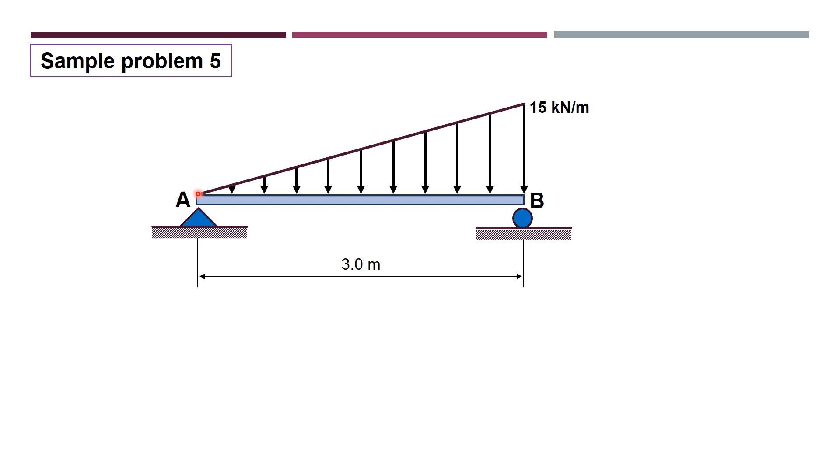So in this problem, or in this beam, we only have one segment, AB, with distance of 3 meters. And the load is a uniformly varying load, which is from 0 to 15 kilonewtons per meter. And this is distributed all over AB. These are the reactions at the supports. And passing an imaginary cutting plane with distance x, this is now our free body diagram.

So for the meantime, sinama ko muna ito, imaginary portion to the right side of the cutting plane, kasi gagamit ulit tayo ng ratio and proportion dito. Just like one of our previous problems. So this is the triangle depicting this load na gagamitin natin for ratio and proportion.

So dito sa tapat na ito ng imaginary cutting plane, ito yung hahanapan natin ng ordinate, and I used symbol y for that ordinate. And from this ordinate, it has a distance x hanggang dun sa A. And then, of course, para dito sa ordinate na 15, hanggang doon, ang distance ay 3 meters. So, we will use this for the ratio and proportion to get y in terms of x.

And this is our equation. So, we have 15 is to 3 as y is to x. If we simplify this to get y, we have y equals 5x. And with this, we can also get the equivalent single force of this triangular loading over the distance x. This is equivalent to the area of this triangle, which is 1/2 ng y by x. And y is 5x, so R is 1/2 multiplied by x multiplied by 5x, or R is 2.5x squared.

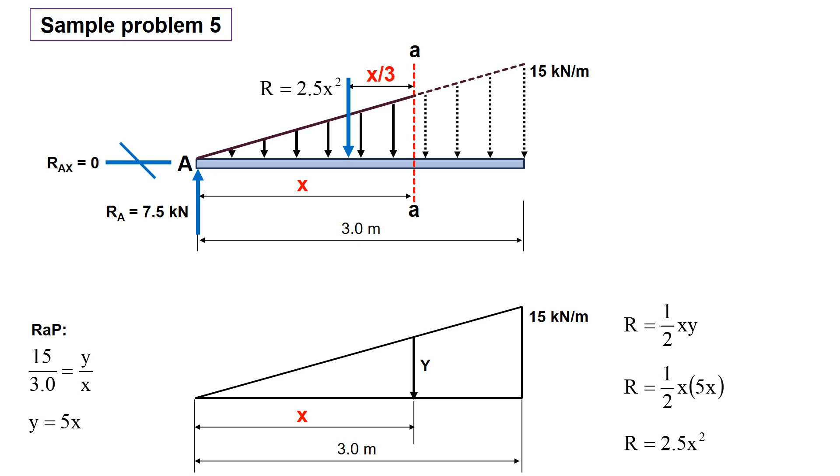Now, for the shear equation, we will sum up all the vertical forces to the left of the imaginary cutting plane, or yung nasakop nito. We have this vertical force RA and this R, which is 2.5x squared. So we will just sum up, considering their directions also. So we have upward 7.5 positive, and then minus 2.5x squared.

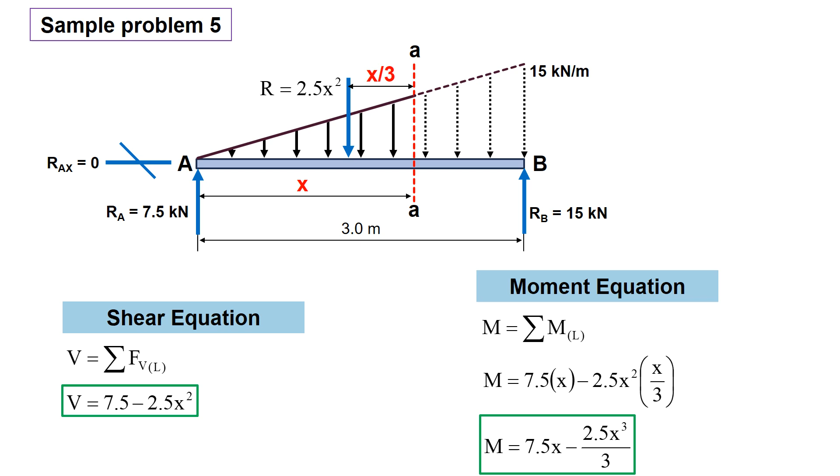And for the moment equation, we have 7.5 by x, this is clockwise, and this is counterclockwise. So that's minus 2.5x squared by this distance x over 3. And simplifying, we have 7.5x minus 2.5x cubed over 3.

Now, let us tabulate the values. Again, from A to B lang tayo. So we will not use any increments, so our x is 0 and x is 3. Using these equations, when x is 0, this is the shear and the moment. When x is 3, this is the shear, and this is the moment also.

So, notice the values of the moments here. When x is 0, nandun tayo sa point A, which is the left end of the beam. When x is 3, nasa right end tayo ng beam, which is B, and the moment is 0. So again, kapag nag-drawing tayo ng shear and moment diagrams, kailangan mag-close sa 0 yan. So with regards to the moment, using the two ends only of the segments, ito ay nakuha nating values ng moment. So let us see.

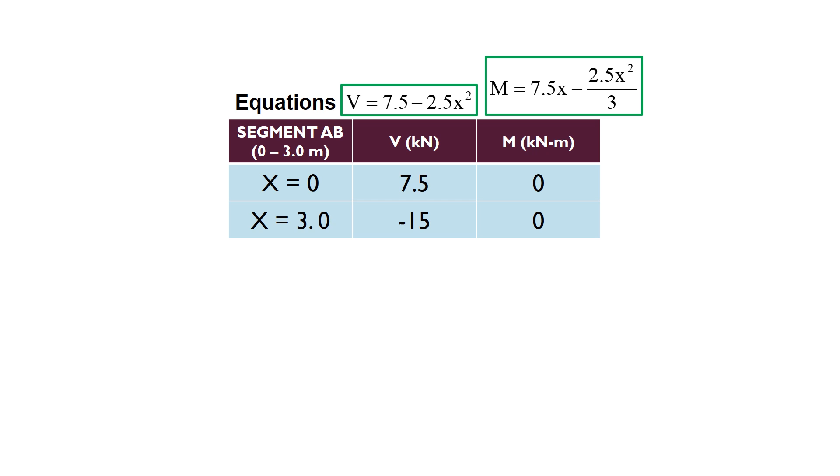So let us now plot the values of the shear and moment. We will draw a line parallel to the beam. And when x is 0, that will be at A. So ito yung na-solve natin na shear value, which is positive 7.5. So we draw a vertical line equivalent to 7.5, representing the 7.5.

And when x is 3, nandun na tayo sa point B at ang na-solve natin dyan ay negative 15. So we draw a line from here, pababa, negative 15. So we need to connect these two. But if we connect these two, anong itsura ng line or ng curve? Kung curve ito, is it concave upward or downward?

So tingnan natin muna itong load diagram. We have here a uniformly varying load from 0 to 15, or it is increasing. Ngayon, when you connect these two, titingnan mo rin ano bang dapat maging degree ng curve. Kasi ito ay inclined line, or this is a straight line. So naka-incline, so 1 degree na ito. So pagbaba mo dito, dapat ang shear diagram mo ay second degree.

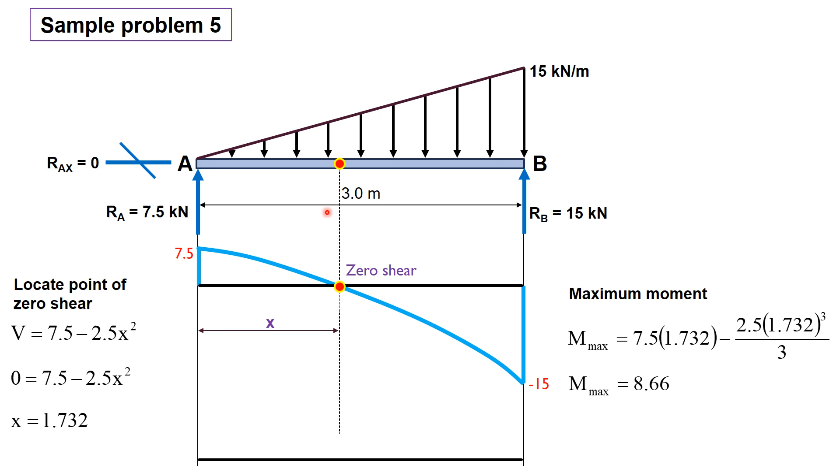There. So, you draw a line parallel to the beam again. And then, dito, alam na natin na 0 dyan. Tapos dito, yung 8.66. And then dito ay yung 0. So, when you plot the values, tingnan mo din ano ba ang concavity or degree nung curve, at ito ba ay concave upward or downward. So again, kung ito ay 1st degree, ang shear diagram ay 2nd degree. Ang moment diagram ay 3rd degree. So, titingnan mo na lang kung concave upward or downward yan.

So, from here up to point of 0 shear, ito yung curve mo. So, it is concave downward kasi based on the guideline, kapag ang shear ay decreasing. Kasi decreasing ito from 7.5 to 0. So, from this point up to here, it is concave downward. Itong ordinate na yan, ito yung 8.66 na na-solve mo. So, pwede rin naman na before you connect this, kagaya nung ginagawa natin kanina, lagay mo muna yung ordinate dyan.

And then, from 8.66 to 0, so is it concave upward or downward up to here? So, tingnan mo ulit yung shear diagram. So, from 0 to negative 15. So, this is decreasing also. Kaya from 8.66 to 0, it is concave downward. So, again, this is not to scale. Pwedeng hindi ganyan ang talagang itsura niyan. But then, ang importante ay ma-represent mo na naka-concave downward itong curve mo dito.

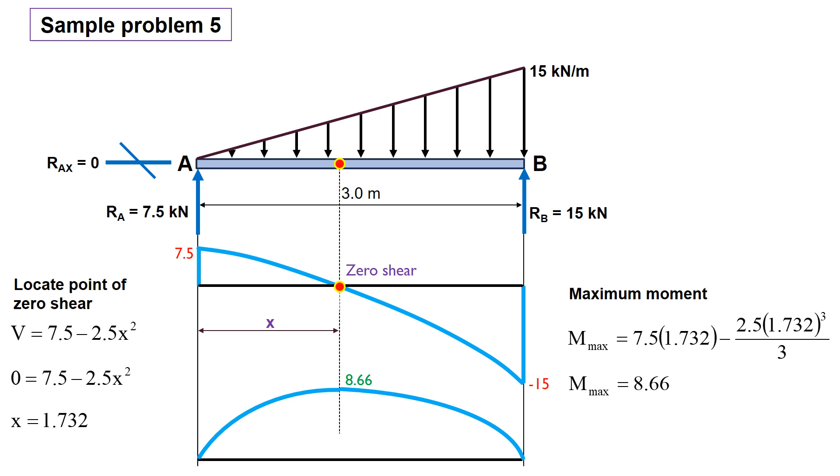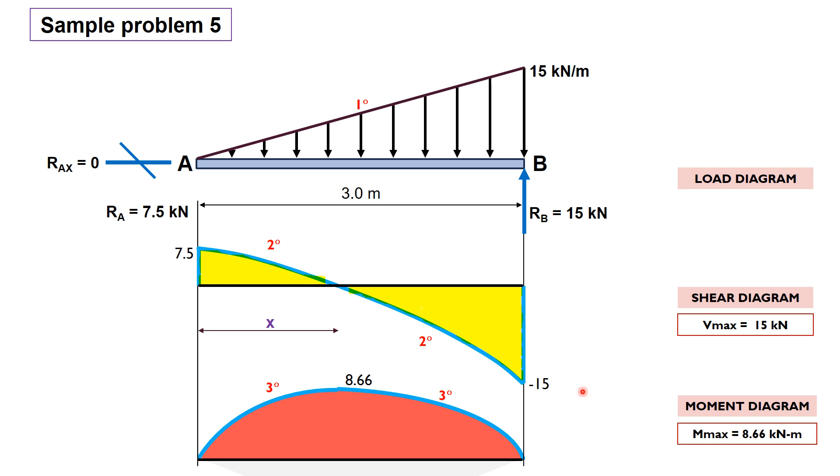And this is now your shear and moment diagram. So, these are now the diagrams. So, load diagram, shear diagram, maximum shear is 15, maximum moment is 8.66.